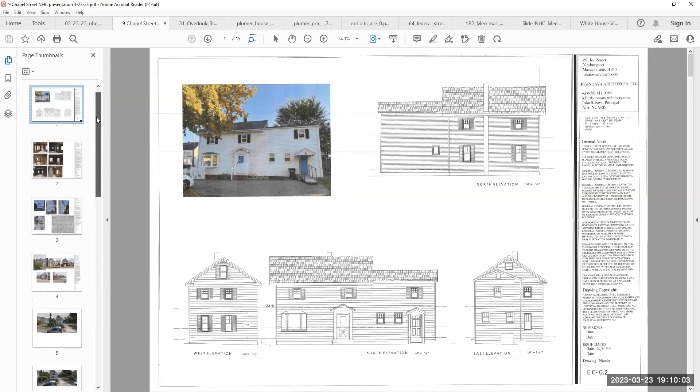In conclusion, the attached drawings and photographs will show that the alterations done by others, in an attempt to modernize their house in an honest and frugal manner, resulting in a more appropriate and comfortable house for their family, is not right for the Penny household, hence the restoration and addition. We feel that this design will add to the street vernacular, and we're hoping that the Historical Commission will also agree. Thank you, John.

Can you see the presentation? Yes, I can. Caitlin, is that okay? Do you want to say anything? I know you included some context photos of the neighborhood and the exteriors and so forth. Do you want to talk us through those briefly? I can do that briefly.

The first photograph on the left shows the front of the house, and you can see that something is missing—it's the entrance, which would have balanced things off. All the upper windows and even the lower windows have just been closed in. You can see also next to that, the smaller windows, and they're pretty much everywhere.

Caitlin, is there another photo that we can show? Yeah, there's a couple of pages of context photos, street views. What was on slide 4, Caitlin? I think that one got jumped over somehow. Okay, yeah, that was my photos of the neighboring properties, right across the street, right next door.

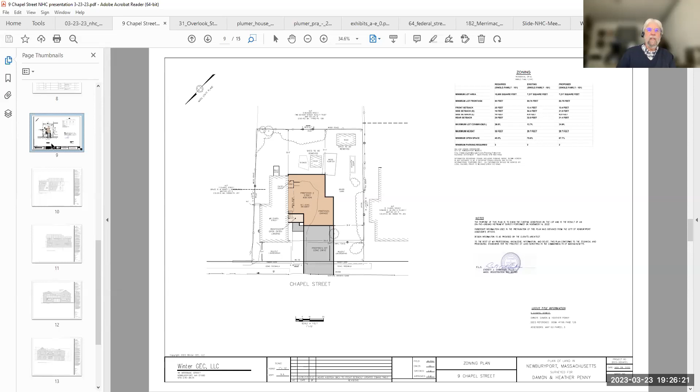Sorry for the interruption. So I think the next one, elevation number 10, that's the rear. And that shows pretty much the fact that we're not doing anything there except bringing back the windows that were there.

So these windows, I'm sorry, they look like they've been enlarged mostly vertically, right? That's correct. There's a couple egress windows we need for code, but generally speaking that's what we're doing, lowering the units again. We're demoing their increase, or whatever you want to call it.

So that's the northerly elevation, and you can see a little bit of the addition on the left. We tried to differentiate where the addition is attaching to the old house. You just see a corner of it there.

And that's the south-facing elevation, so this is like from the driveway side. That would be correct, looking — in other words, Chapel Street is on the left in this. Chapel Street is on the left, right? Right, that's sort of facing southerly.

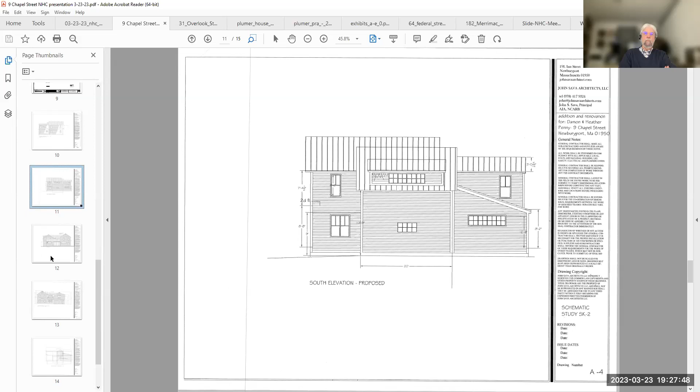And you can see the original building on the left where the dimensions are. We got rid of the bay window, which just didn't work very well at all, and we doubled up with some more traditional windows.

And then the next one is the front elevation — oh, okay, no, yeah, that's the east. This is what you would see looking from Chapel Street. No, this is actually looking at it from the back, the backyard, with French doors out to a patio. And the right side of the house is the original house.

We kind of altered that a little bit, but just because of program needs.

Yeah, and then that's the front of the house. That's the elevation that we really like. That's the way this house should look if you didn't have an entrance off of Chapel Street. You could see there are hundreds of houses that have that gable end. And then beyond that is the connecting link to the house, set back quite a bit. The heights of the house are higher than the additions, so that takes center stage.

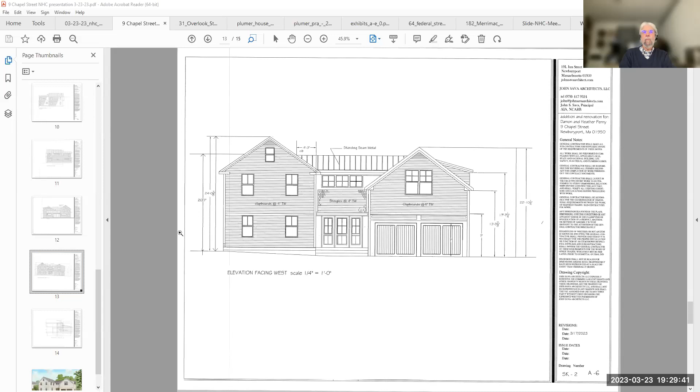Yeah, it's a little hard to tell from here. I was thinking about this when talking to someone else, and how in these elevations it's a flattened, sort of perspective. So it's a little misleading because, do you know about how many feet the right-hand side is set back? Well, could we jump to number 15?

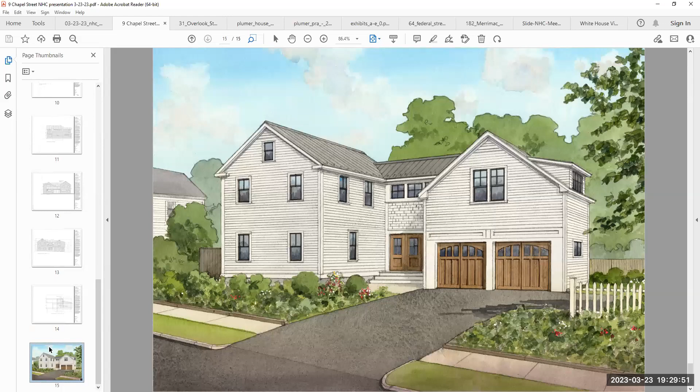Oh, okay, yeah, the rendering. Okay, that's nice. So this is what I feel really kind of works with the house. I come from a house that's from 1740, so I have a feel for some of these. But they're just modern people in an old house. I think this sort of works.

What this rendering doesn't show is the adding of the double unit we talked about. There's only one window showing there, but on the stairs, as you enter into the front door, that window on the left as you're walking towards the front door is actually a double window. Oh, I see. I think the elevation had it correctly, right? Yeah, the elevation had it correct.

So this is a house, it's sort of a quiet addition. It's white, and the trim works. The landscaping should work and help the house. The back of the house is modern, but the connecting link—I tried to make that link as light as possible with windows, so you sort of look through that into the backyard. There are windows just like that in the upper connector, so there's some transparency in the house.

Anticipating a question I had, and my peers might as well—it seemed an odd choice of roof to have that standing seam metal roofing. Was there a reason for that particular choice? Yeah, it was a requirement of the clients that they want a trouble-free roof. And I've put metal roofs on many, many houses. And if you drive around into New Hampshire and every other place, you do see metal roofs on a lot of these houses for those reasons.

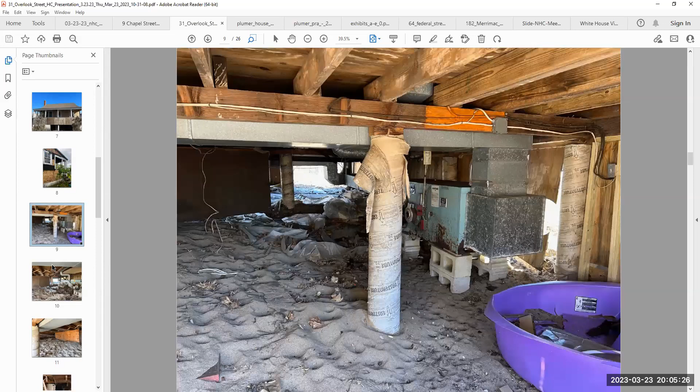Just to take a quick peek under the house. Obviously, I'm thankful for Tucker for getting these photos and not having anything fall on his head or any wild animals attack. But as you can see, they still have the sonotube there with the concrete pylon. Pretty undersized, and it looks like there might even be some wood blocks just sitting on top of them. The utilities are also not in good shape, with rust there and even some water sitting on cinder blocks. Could you go to the next slide, please?

Here's just more of the same, kind of a deeper view there. Again, just the wood sitting on top of the sonotube and some exposed wires. Next slide.

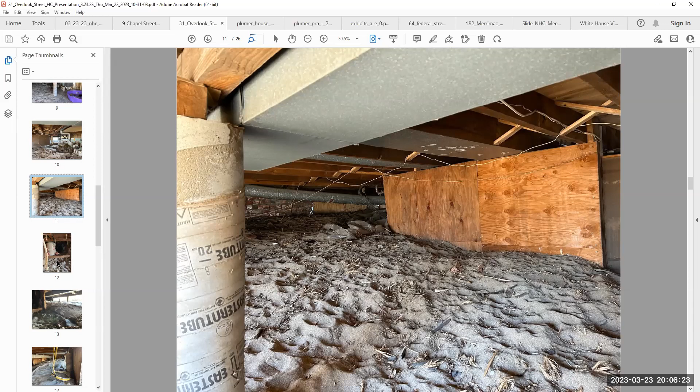Just more around the crawl space again with the wood, which I think was intended to block off some of the elements, but still it's right on the sand there. So next slide.

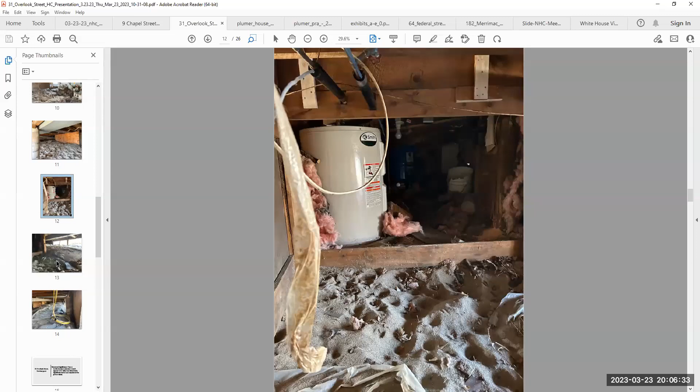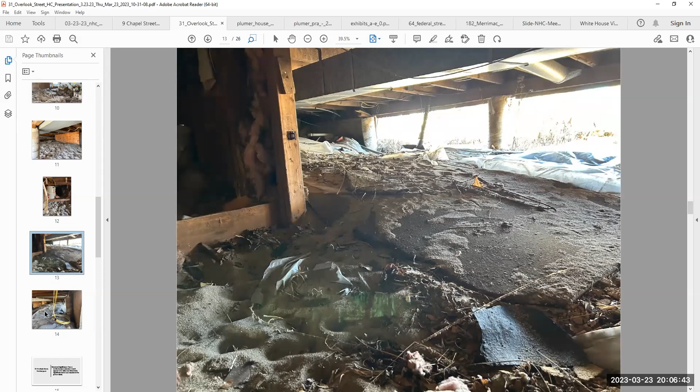Again, more just the exposure of the utilities, some insulation and wiring as well. This is looking back out the way that we came, back towards I believe the rear of the house. And then next slide.

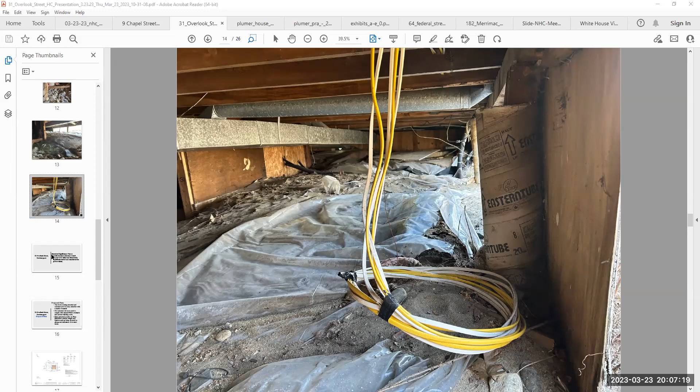And finally, just one more view. You can see either the house or the sonotube there isn't exactly level and really not in the best shape, as well as just the wiring, and I'm informed there's been some electrical work done, but not fully completed. And actually, just while we're on the subject, the house doesn't currently have indoor plumbing. All the interior plumbing and fixtures have been removed, so those aren't inside the house at the moment. So go to the next slide, please.

So that's really all I have for the first part. I do enjoy doing the historical research for these applications, and unfortunately I don't have much else here or much else of a story to tell. It's about a 78-year-old house, so it just about qualifies as being over 75 years old, and obviously the current condition is unfortunate. So we feel in this instance it would be a structure that's either not historically significant and/or not considered for preservation. But I'm happy to answer any questions the board may have. We also have the architect on the call tonight as well. But that's all I have for right now.

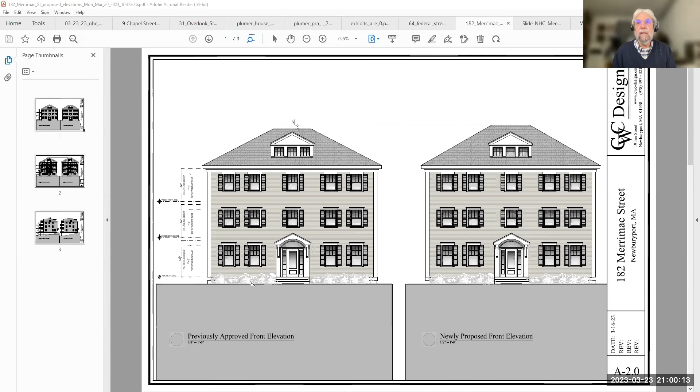All right. First of all, thank you for coming in to review this with us and not just barging ahead as some people have done in the past. So we definitely appreciate that. And I hope that we're able to find a solution to this that's going to work for you and the structure, and keep it alive for many more years to come.

Well, I appreciate your support, and in all honesty, the last thing I really want to do is have to pay for a new roof, but I just think it's the right thing to do in this case. But your support and understanding has been greatly appreciated. Thanks again. Thank you, everybody.

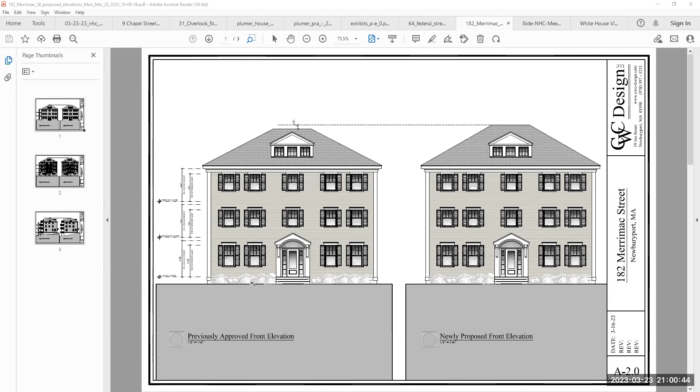Okay, thank you. And thank you to the board for working with us and finding a solution to get this approved and make you happy with it or comfortable with it. So I appreciate your time. You're welcome. Okay. Thank you. Have a great night. Thank you.